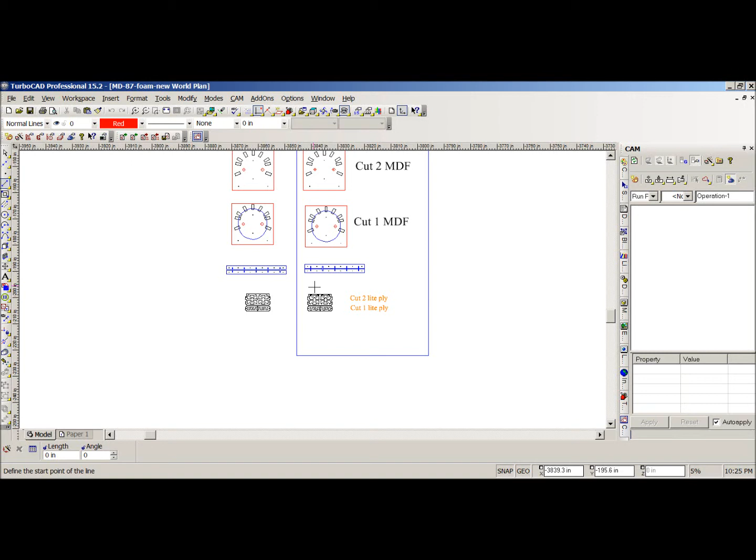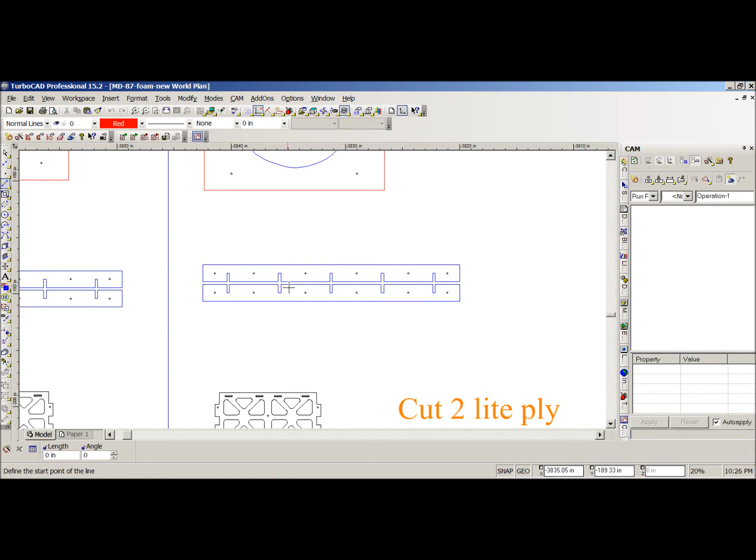I'm going to make this a very long video because I am going to cover a lot of things. With the fuselage mock-up, I have these foam pieces. These foam pieces are just spacers that are going to locate each bulkhead so that it's in the right spot. Also, once the fuselage is built with the bulkheads and the stringers, then these pieces of foam will come out.

Let's start at the beginning up here. This is the bulkhead. I decided to go with the blue foam, which is the fan fold. It's 1/4 inch, 6 millimeter, that kind of thing, and should be pretty light. We have 3 holes, 2 of these will be used. They'll have aluminum tubes in them until I get the stringers glued in place. Once I get the stringers glued in place, then I can pull the aluminum tubing and insert cardboard tubing.

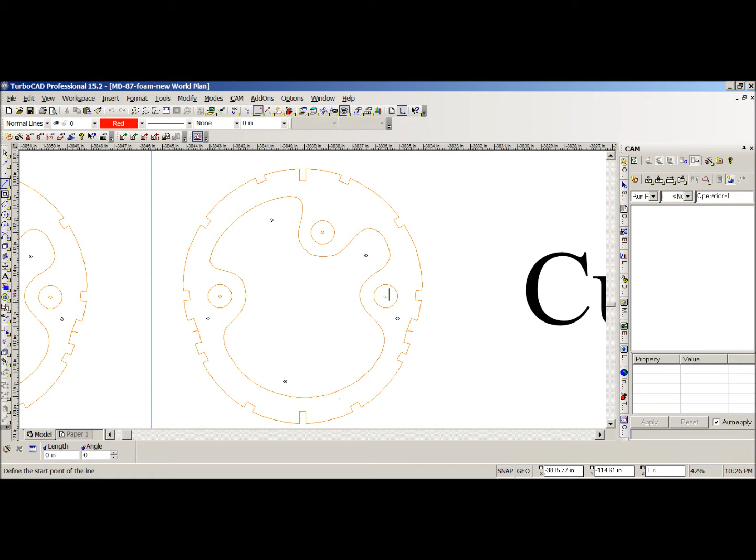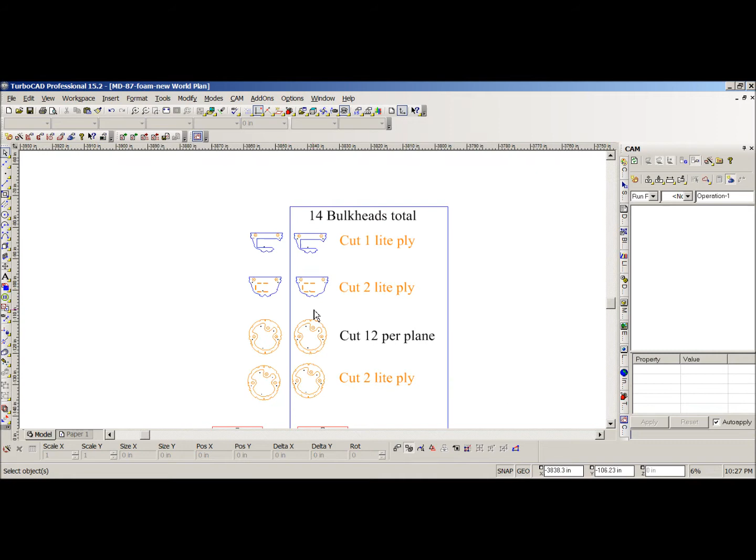The wood parts do take a little longer to cut, so therefore I didn't do much video with those being cut. But here's the parts. You can see this is the center section. This is the end, there's a left and a right, or a front and a rear of the battery compartment. This will be the bulkhead.

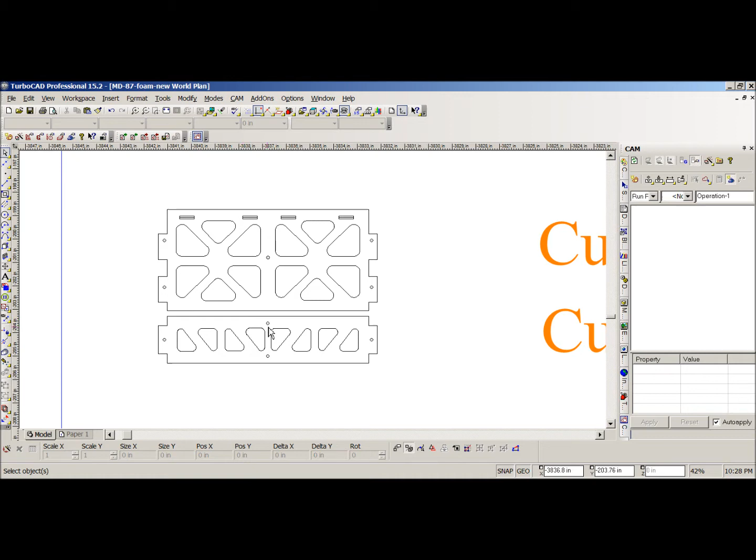They'll be cut out of foam. Also, I have some that are light ply. The ones that are light ply will be attached to the nose cone and the tail cone section. And one last thing, this is the battery tray. This is the top and the bottom, and then this is the back side. The front side will be facing the door, so you'll see a little bit of that in a couple of mock-ups coming up.

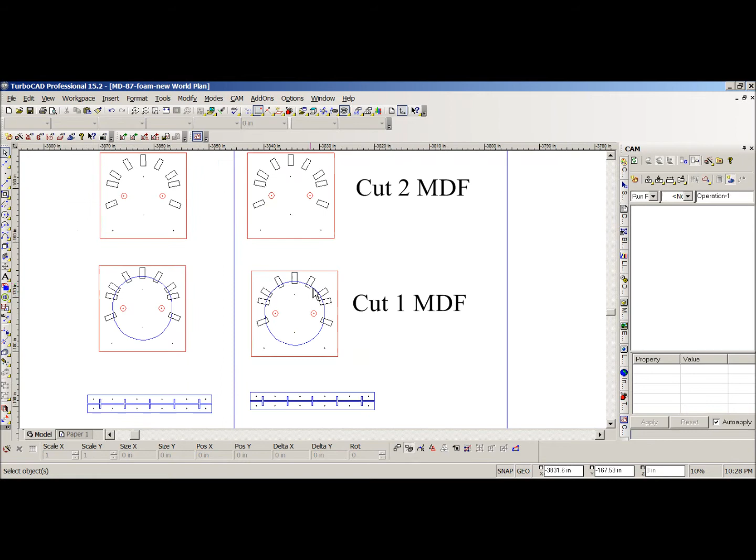I came up with a mounting system for the fuselage so that I could keep it straight, number one, and number two, so that I could ensure that the sheeting got mounted to the stringers. If we take a look here, I'm just going to do this real quick. If we take a look at this stringer or the bulkhead, I'm going to copy it and take it and paste it down here, because this will make a lot of sense of what you're going to see here in a few moments as far as the mock-up.

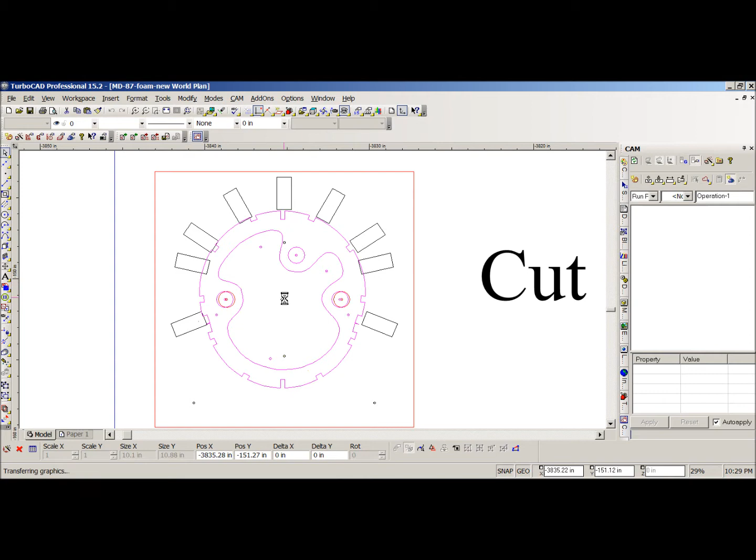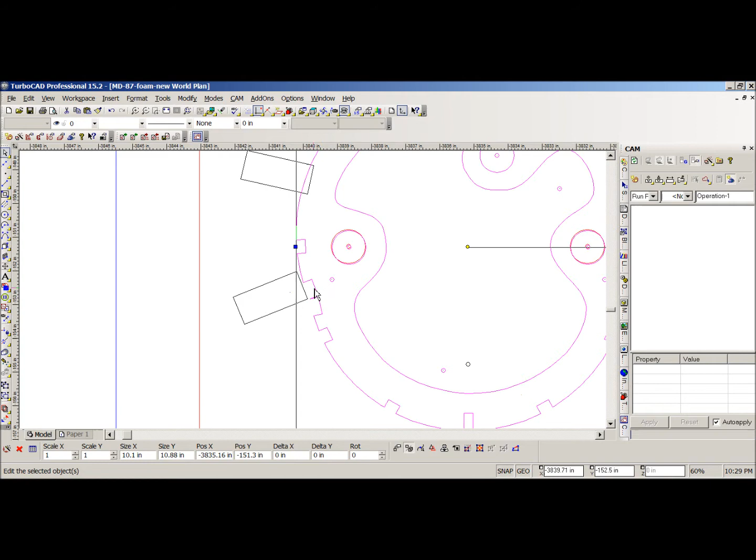What you need to pay attention to is the way this works, and I'm going to line this up. You can see here now, this edge, there's going to be a 1x2 inside this slot, and on the back side of this slot there's going to be shims. So whenever the bulkhead is set within this fixture here, I'm going to shim the back side, and it's going to push the sheeting right up against the stringer. You'll see it's hitting this stringer here.

If we back out, you can see that this slat will hit this stringer, and then this slat will hit the center, the top stringer. This slat will hit this stringer, and this slat will hit this stringer. So whenever I go to sheet the top, I'm going to be using this slat, this one, this one, and that one. Now if I rotate this around 180, I want you to watch what happens.

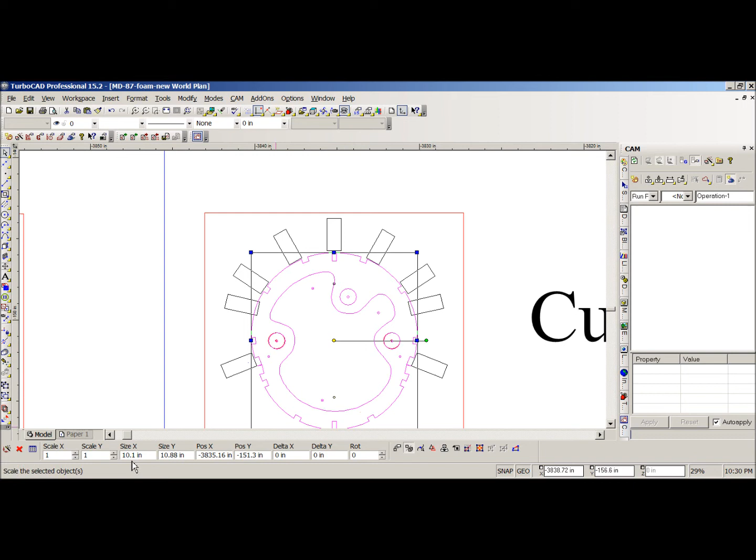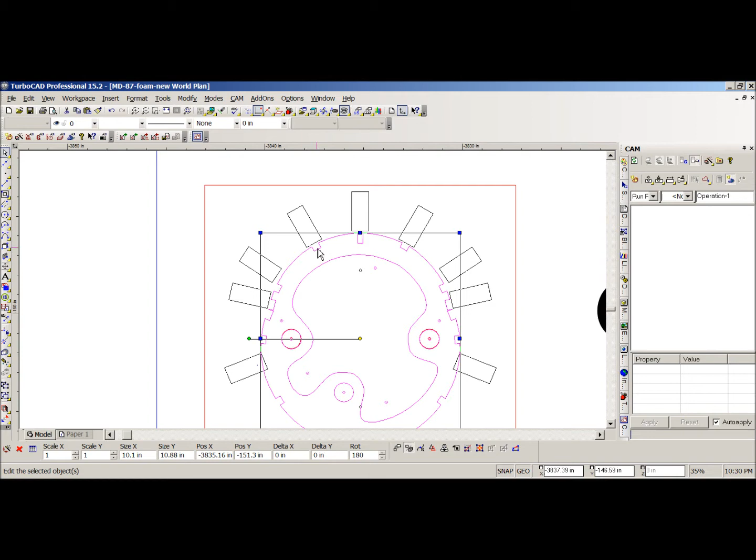180. And now you can see that all of a sudden I'm going to be using this slot, because it meets here. This starts the bottom from here all the way back around to here. So you can see I'll be using this slot, this slot, this slot, this one, and this one. And that will be putting pressure on the skin, on the outside skin, that pushes it right up against the stringer.

So I will have good contact with the sheeting and the stringers, so I should get a good bond. So I thought I would go over that real quick here in the drawing. Sometimes it is a lot easier to do it in the CAD program, so that you can actually see what's happening, because unless you can see the whole thing, it's hard to figure out exactly what I'm trying to convey to you.

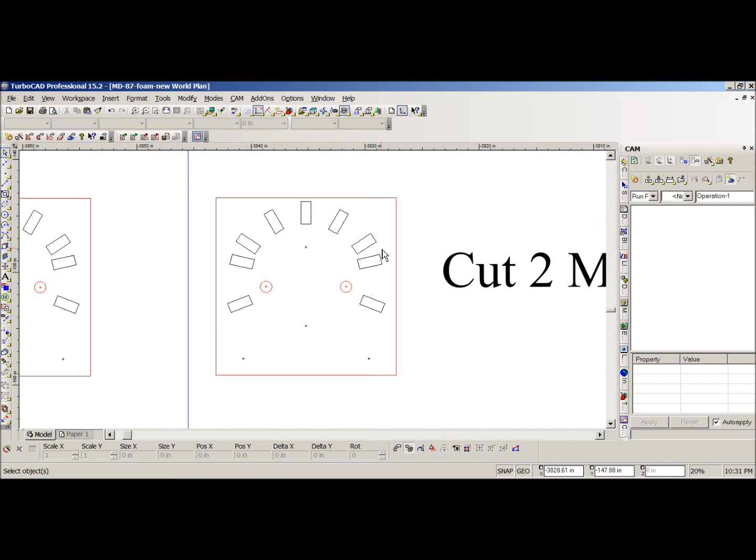But at any rate, that's what you see these slots for. So when we do the top side, we'll be using some of these slots, and when we do the bottom side, we'll be using the other slots. The only slot that we will continue to use on both is going to be the center slot. So if that got confusing for you, rewind the video and watch that section again where I just flip it over, because that's the same as rolling it. At any rate, it should make it real easy to sheet the fuselage.

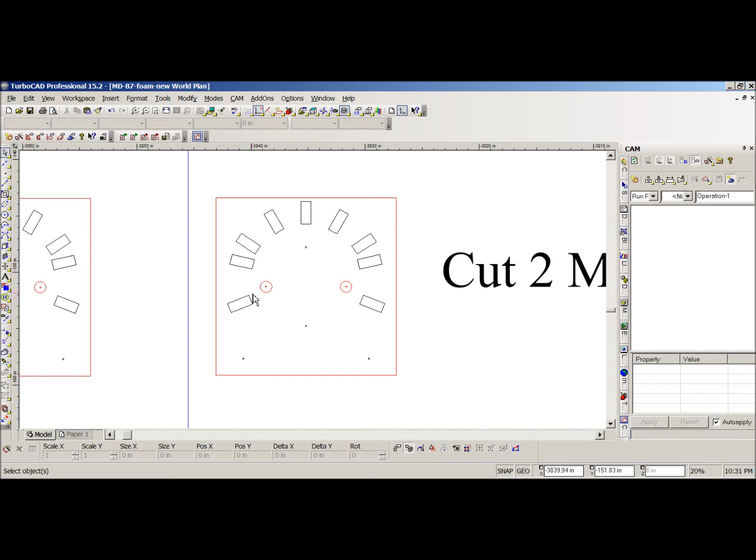And the sheeting that's going to go on the fuselage is simply the blue core. There'll be 4 pieces, they'll go from the center all the way back around. And actually, if we look at the bulkhead, it'll go from here all the way back around to here, and then the bottom side will go from here all the way around. The reason it's going to be 4 pieces is because the sheeting is not long enough to do the full length.

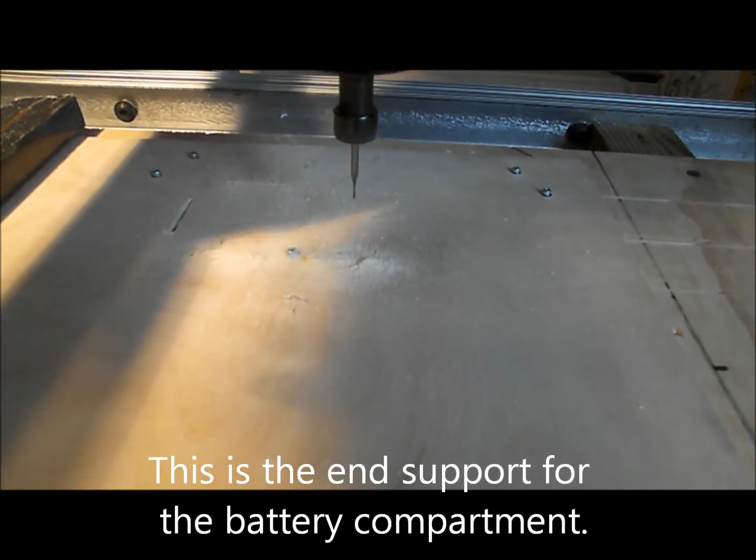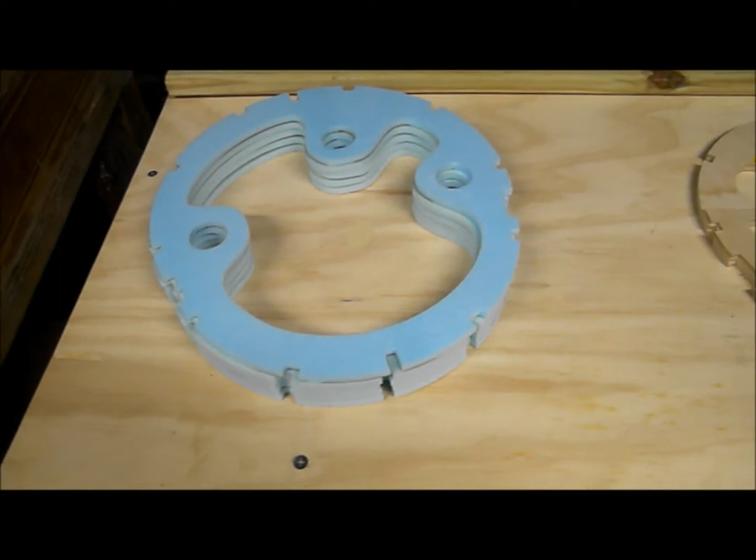We're going to start by showing you the bulkheads for the fuselage, and these are bulkheads that will be used on either end. They will be plywood because I'm going to be gluing the nose cone to one of them and the tail cone to the other, and these are actually extras. This is the end support for the battery compartment.

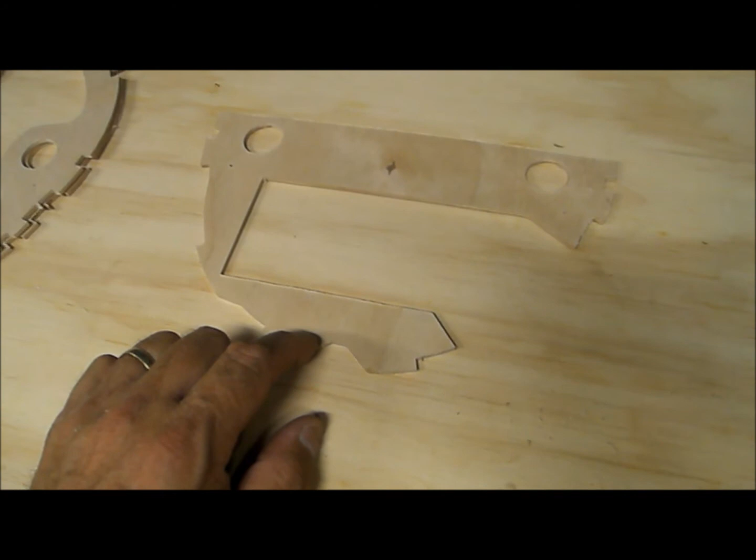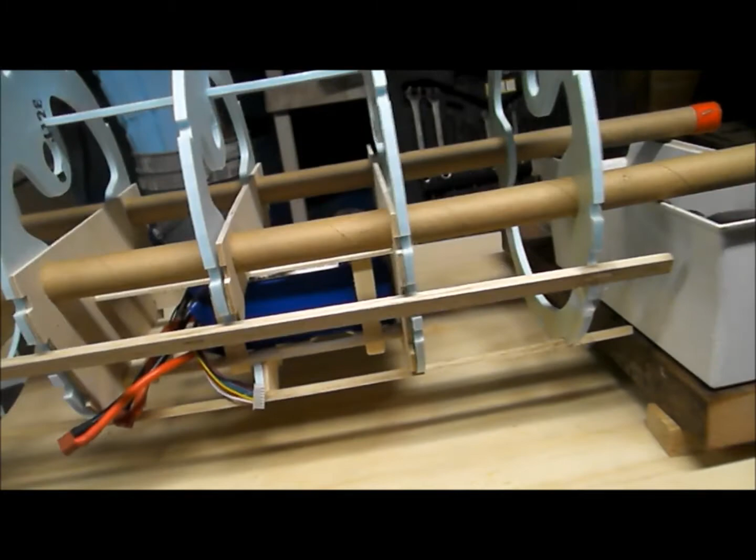Here's a mock-up of the battery compartment area of the fuselage, and I've just taped up a couple of stringers just so you'll have an idea how big the actual battery compartment is going to be. You can see that it's about 2 inches larger than it actually needs to be. This will allow me to shift the batteries fore and aft to adjust the CG.

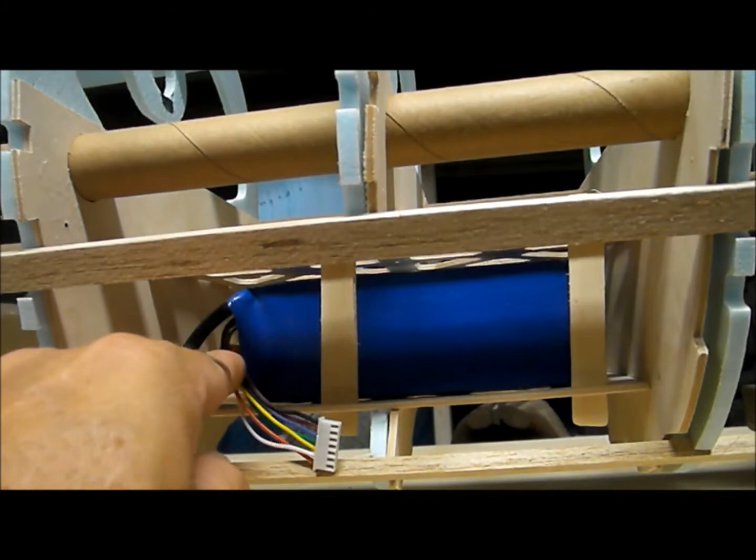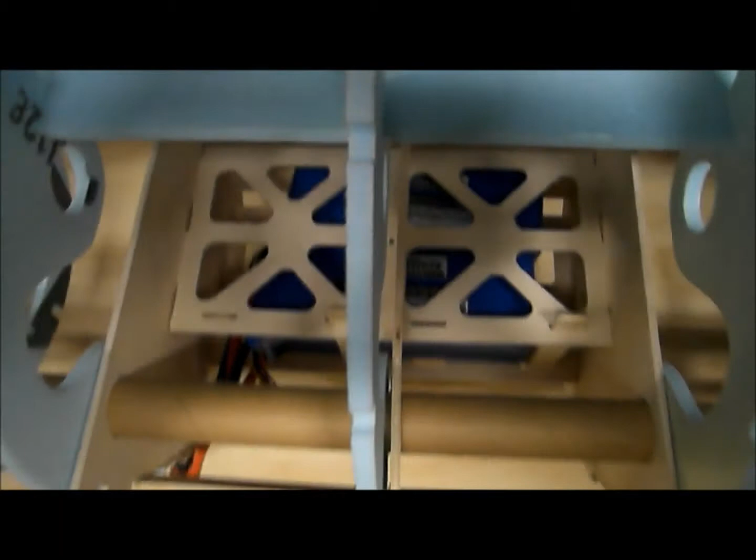Once I get the CG adjusted, then if I need to, this slat here can actually move back to here, and then I can use the front slat. If we look at it from the top, you get a better idea, but you can see that these, I have a slat here, here, here, and here. So depending on where the battery actually winds up going, I do have some freedom to adjust the battery.

Here's a look at the fuselage mocked up. Now there's no glue on anything right now, it's just sitting here friction fit. The stringers, 1/4 inch by 3/8, 1/4 inch by 1/2. The aluminum tubes, they're used to build a straight fuselage.

Once it's built with the stringers on it, then I'll take these out and they will be replaced with the cardboard tubes that you've seen over here. These tubes here will line this hole and these 2 holes.